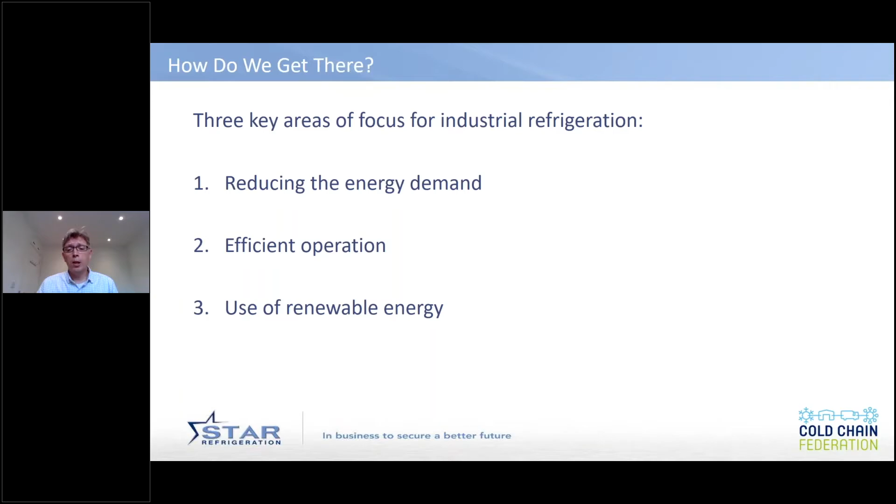So three things there. I'm really going to be focusing on 1 and 2. So where have we got so far? Well, an encouraging start, if we look at the recently published document from the Cold Chain Federation on climate change agreement performance from 2013 onwards. As an industry, you've exceeded your targets, which is a really good and positive step.

But how have we got there? Well, just some observations of things that I've certainly seen and have come back to me through working with operators in the industry. The first of which is that there has been a real change in the focus. There's been a greater focus on total cost of ownership of particularly cooling systems. On sites, they're the biggest energy consumer, and apart from transport, which we've already covered with Alan, these are a major carbon emitter for any business in terms of the energy that they consume.

And there's been a greater focus in terms of how can we get that energy cost down, because in the life of a refrigeration system, more than 60% is down to energy. Historically, there'd often been a focus on capital cost, and that still remains important. But actually, investment at the capital stage can save significant amounts of energy in the future in terms of operating efficiency, not just at peak demand, but also throughout the year. It can also help in terms of reliability as well, and providing better maintenance costs.

And one thing that is very clear as well is that operators are much more focused on what their running costs are. They've got a better handle on the energy consumption for their site. A bit I'll come on to later on is do you know whether that's good, bad, or indifferent? And a further step that people have taken is moving away from high GWP gases. I know Alan mentioned that previously, and moving towards gases like ammonia, which have no effect in terms of global warming if they do pass into the atmosphere.

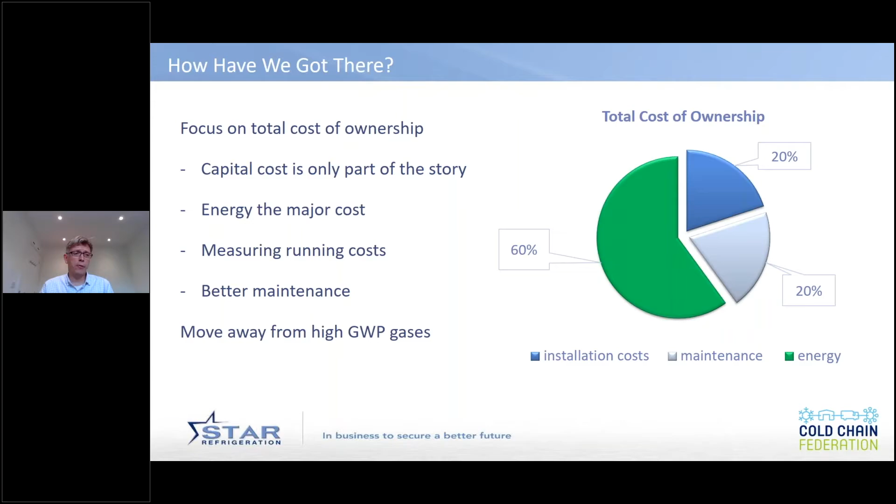From a refrigeration industry point of view, manufacturers of equipment and suppliers of systems have been really focusing hard on improving efficiency of plants, both in terms of new equipment, but also retrofitting energy-saving devices onto existing equipment. Things like compressors, which are the real heart of any refrigeration system and typically consume 70 to 80% of the energy, have been a real focal point. Selecting the right type of compressor based upon the application, the temperature, the size, and load profile within a store. Chill store load profiles differ quite considerably to cold stores, for example, based upon ambient temperature. Really focusing on that, picking the right equipment.

Fitting variable speed drives is very good in terms of part load efficiency, because refrigeration very rarely runs at its design capacity. It often runs at much lower capacities and in lower ambient temperatures. And then also looking at things like EC fans on evaporators and condensers. That's helped reduce energy consumption there, and they typically account for about 20% of the overall system operating cost in terms of energy drawn. And then the amount of energy that's consumed throughout the year, how we can take benefits in the seasonal changes in temperature, because as the ambient temperature reduces, we should be able to take benefit of that and actually reduce the consumption of plant.

So we've looked at how we can better optimize that, and by fitting various pieces of equipment, we've achieved certain improvements. Then looking at things like controls. Controls have become more sophisticated through the development of PLC systems. They enable you to take the best advantage of all those components that you've fitted and bring them all together to an overall system improvement. And further developments mean that you can actually monitor real-time performance, and it can alarm and alert to say we are moving away from what is good in terms of efficiency, and you need to come and do a service visit or improve various aspects of the plant operation.

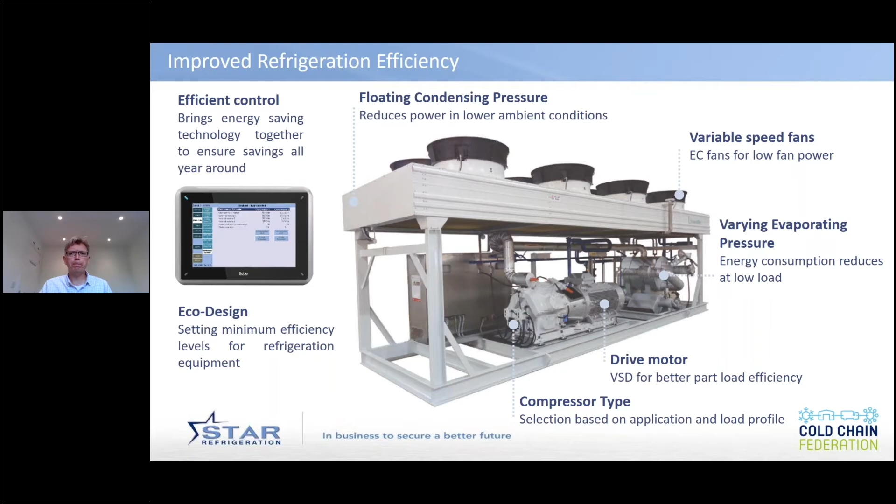So just showing that graphically, if you look at a typical system, a traditional type of system as being your 100% energy consumption, moving to efficient equipment, we can get significant benefit from things like variable speed drives on pumps, fans, compressors. Typically in this example for an installation that we looked at, about 19%. But the real boost in efficiency comes from actually tying that all together and making sure that whatever is controlling the starting and stopping and speeding up and slowing down of all these fans is operating efficiently.

And then more importantly, as the plant goes through its operating life, is monitoring to make sure that it retains its efficiency. Because it's one thing to have a plant that's efficient on day one of commissioning, but 5 years later, it still needs to be there. Otherwise, this creep in energy consumption, which can be small year on year, but over many years can be quite significant.

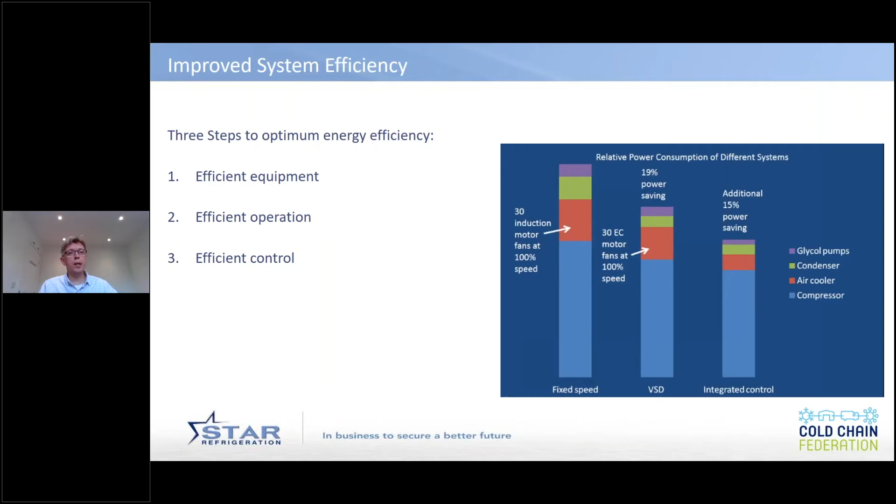Further improvements, there's been a lot of changing in terms of store operating temperatures, particularly at lower temperature. Traditionally, -25 or -28 might have been used for frozen storage. But for every degree we increase the temperature of those chambers, we can get a 2 to 3% improvement in energy consumption. And so therefore a move towards more of a -20 type figure has been a popular move, saving 10 to 15% on energy consumption. That has to be done quite carefully, particularly when you look at it in relation to things like demand response, which is very popular within the industry as well.

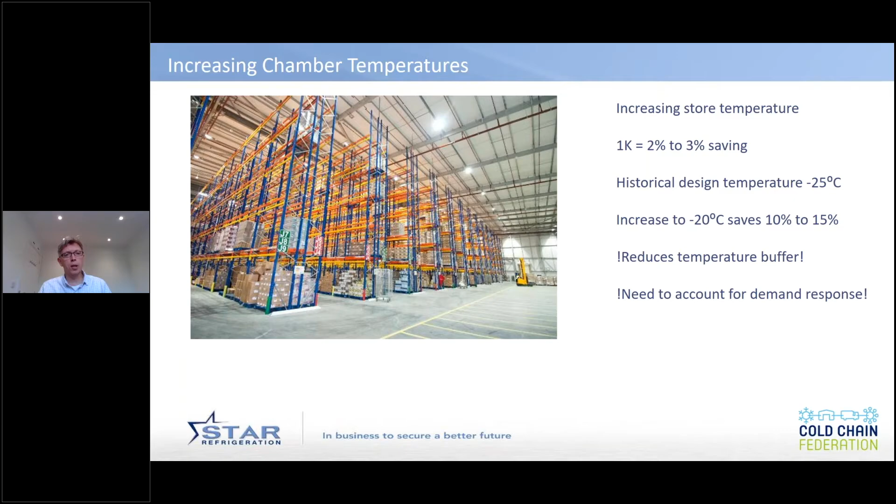By raising the store temperature, you reduce the buffer, the temperature buffer that is there should anything happen to refrigeration equipment, should there be a power shortage, or should you be off due to demand response. And it is a careful trade-off with those to make sure that you've got sufficient equipment and that you don't compromise product temperature when doing this. But we've seen many operators move away from the more traditional temperatures, particularly at frozen conditions, to a higher temperature to improve performance.

And then the other thing we've seen is around the operation of the facility as well, a greater focus on particularly things like doors. The refrigeration plant only really runs to extract the heat that has gone into a particular chamber or building. And by far on warehousing, the biggest sort of contributor to heat going into the building is through doors.

So here's a couple of photographs of examples of poor door control, ill-fitting lorries onto loading docks, leaving large gaps, lack of maintenance on doors. The diagram on the right is somebody propping a door open because it was broken. They didn't want to close it because then they couldn't get it open, so they propped it open. All of the time, energy is pouring into that building, not to mention the health and safety issues associated with water coming in through the door as well.

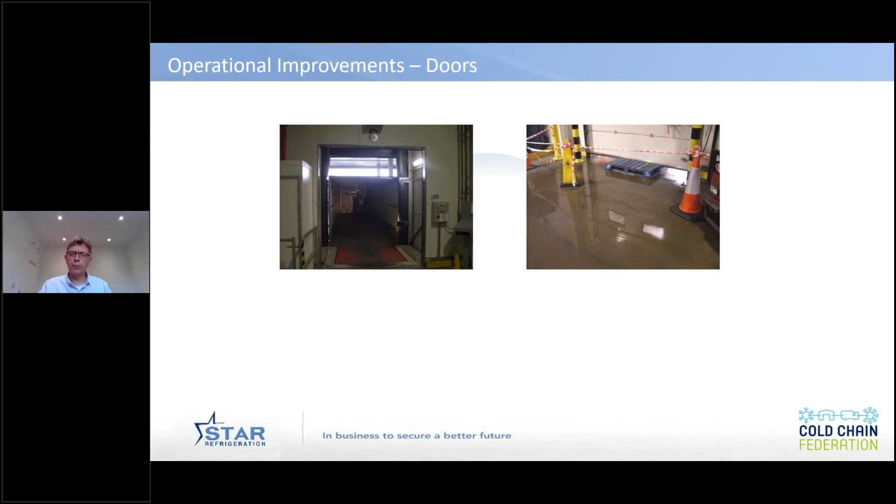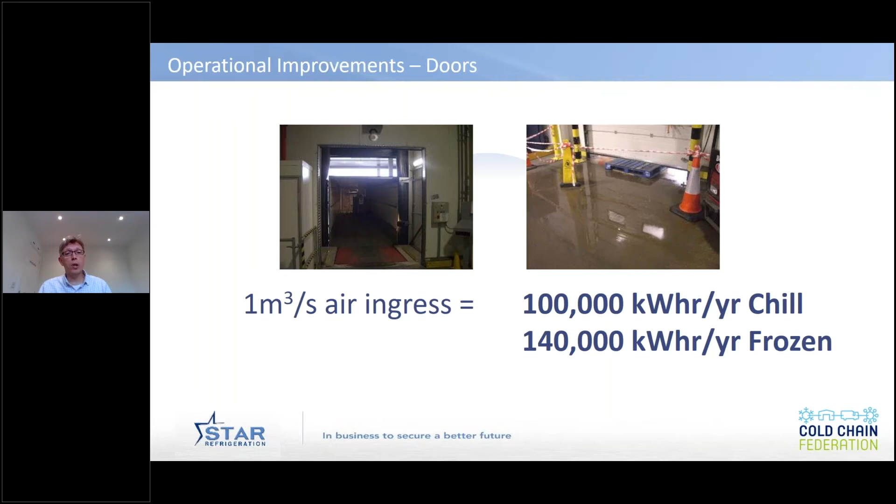And just putting the stark facts there, for every meter cubed of air ingressing into a facility per second, over a year, that's consuming something like 100,000 kilowatt hours for a chill store, and for frozen about 140,000 kilowatt hours of energy. So we've seen much more focus on better operation, upon door control, and trying to avoid this infiltration. But it's an area we could really work on in terms of the future as well.

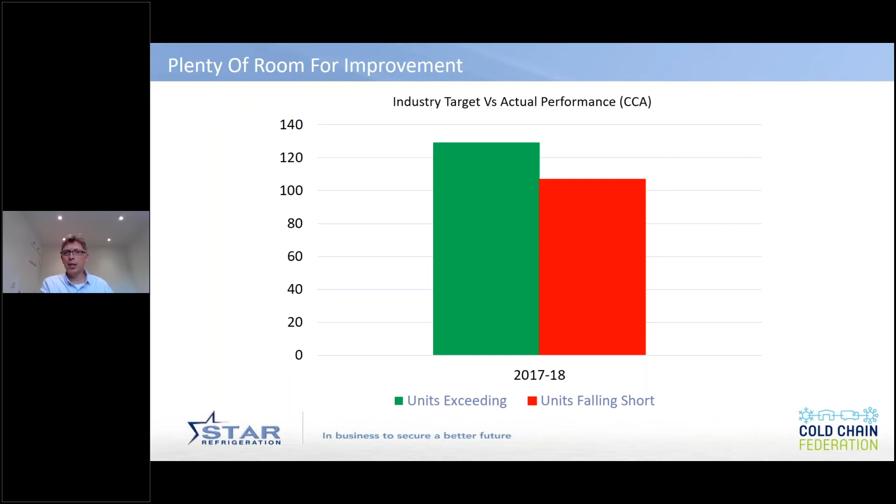So lots of good things that have been happening, but actually when you look at the report and the recent document issued by the cold chain, what you'll notice is that whilst around 55% of all those measured exceeded targets, there were 45% that didn't exceed the CCA targets. That's a great opportunity for those 45% that didn't, because we need to bring them along on the journey. We need to turn them from red to green. But what we also need to do is reduce the energy consumption of all those that did exceed, and we need to continue to push and improve from that perspective.

The good news is that there is a real opportunity to take control of this moving forward. Alan already mentioned about this whole idea of monitoring what you're doing and assessing what can happen. And that really starts with benchmarking. And that's one thing I would really recommend that operators do. Many do benchmarking within their own business, but we heard from the previous presentation, actually, collaboration is a key part of all of this as well.

So benchmarking as an industry would be a good starting point. And quite a lot of work has been done on this. There was a really good report written 4 or 5 years ago, which looked at benchmarking stores across the whole of Europe, and we'll come on to that a little bit in the next couple of slides. But once you do that, you can assess where you are. You know what the size of the task is ahead. Also, commercially, what the size of the prize is as well, because reducing energy consumption, reducing the amount of carbon emissions through the electricity means that you can actually save on running costs as well.

From there, you can then start to implement a plan moving forward. And as was previously mentioned, this is an iterative process. It's a case of continuous optimization. Look at how we're performing, look at where we're heading in terms of our journey, and carrying out further improvements, and then driving down carbon emissions. And with that as well, what we tend to find is we get increased reliability. So it's a real win-win.

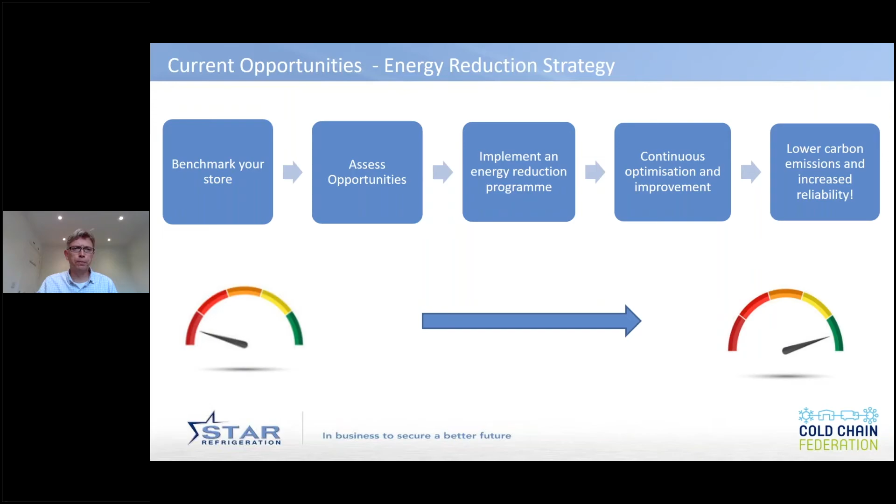It's really simple to do. Here's just an example of a simple calculator that we've developed with my own business. And from that point of view, it needs basic information. What's the volume of the store that you're operating? What's your annual energy consumption? Both of which you'll know because of things like the climate change agreement information.

By inputting your energy costs, you can actually determine what the financial benefit would be for improving efficiency. And then a rough estimate of what the percentage consumption of the refrigeration compared to the overall site is will get you a better feel for your performance as well. But from that, what you can then do is start to benchmark.

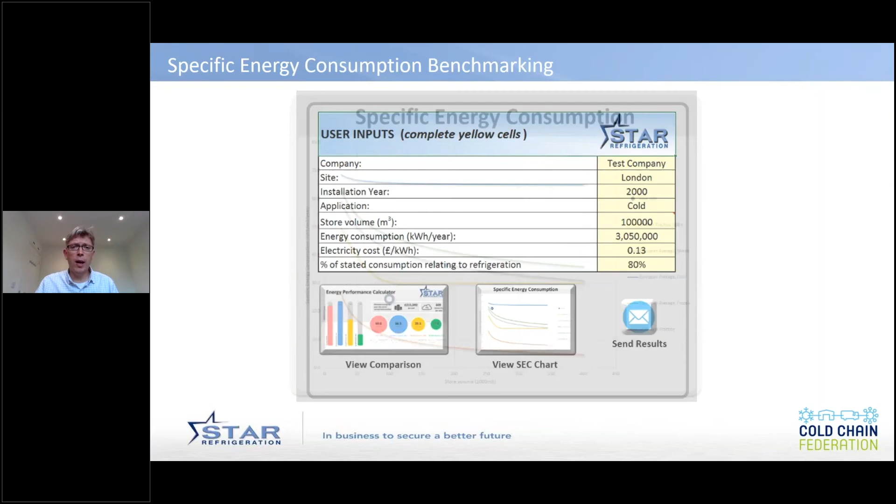So the graph here shows some European statistics for temperature controlled warehousing based upon volume on the bottom axis there, and then specific energy consumption up on the left hand side, which is the amount of kilowatt hours per meter cubed of volume per year. And by inputting that relatively straightforward, simple information, you can compare that: the blue line at the top is the average for European chill facilities, green is for frozen facilities across Europe, and grey is mixed.

What is noticeable there actually is the European performance is actually higher than the yellow line, which is actually UK best practice from 1994. And one would have expected that we've improved somewhat since 1994, but I'll come on to that later. But yeah, benchmarking on there, how well am I doing? And actually, should we be setting some more strict and challenging targets as we move into the future?

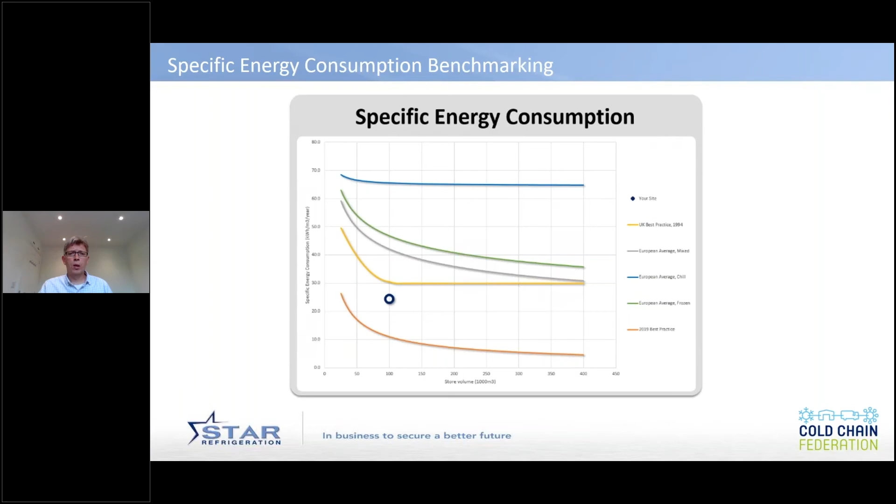From that benchmarking, then what you can also see is, well, how many tons of CO2 emissions could I potentially save if I get towards a future best practice target? And you can start to measure that. You can start to measure your performance against it. You can start to implement changes in the way that you're doing things and seeing whether you're heading in the right direction towards that. And at the same time, you can also get a feel for what that would save in terms of operating costs per year, because some of that then can be ploughed back into further investment.

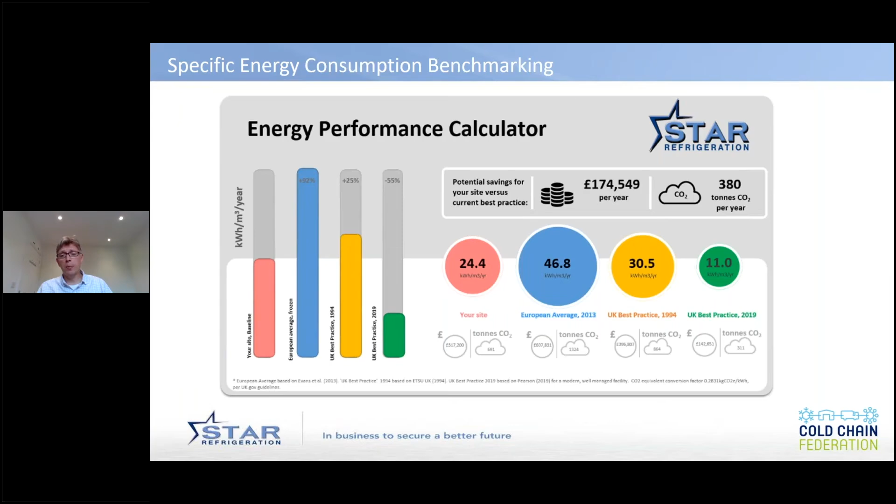What we also have the opportunity now as well with the technology that is in the marketplace at the moment is to really take control of day-to-day performance of this big energy consumer on any site. As the owners and the operators, you can get that information in real time. You can see when performance starts to slip, and you can actually take control of that and deal with it straight away. Most modern refrigeration systems have the necessary telemetry and information. It's just not extracted and turned to good use.

But with modern software, we can perform calculations to determine actual plant performance and compare this to what it should be doing based upon the way that the plant was designed, looking what that gap is, and then saying, well, from that gap, what are the steps that need to be taken to get me back to an optimum position in terms of performance, to get my carbon emissions down from my refrigeration system, and what's the benefit going to be if I implement these?

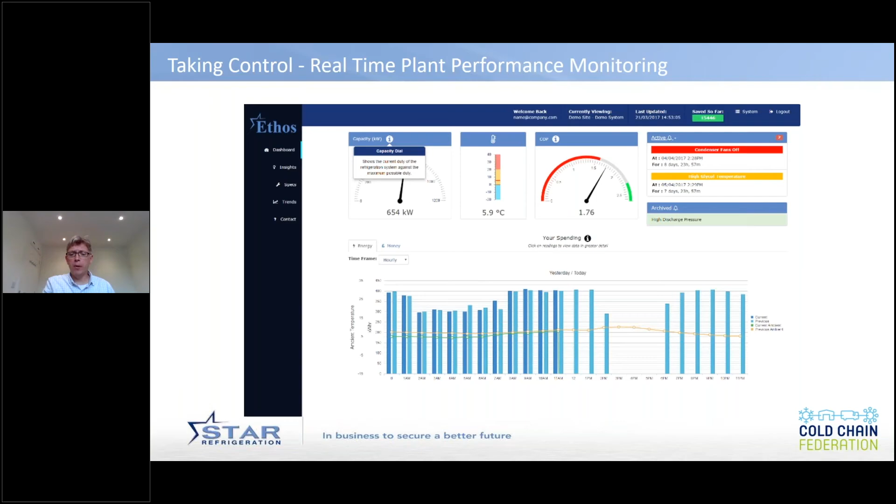So yeah, taking back control of all of that, finding out, is it because of underperforming equipment? Do set points need to be changed on it? That information can all be extracted, taken away, and this is all done.

It can all be done in the cloud, away from site. Reports issued on a regular basis, and therefore you're taking control of what is actually happening on the facility, day by day, week by week, month by month.

It's basically moving the refrigeration plant from that room at the back of the facility that's quite noisy, that nobody ever goes in, and bringing it to the forefront and putting it in the vision of those that are actually operating the store. It can also then, through the savings that are projected and through an understanding of load profile, really provide useful information to drive your business moving forward.

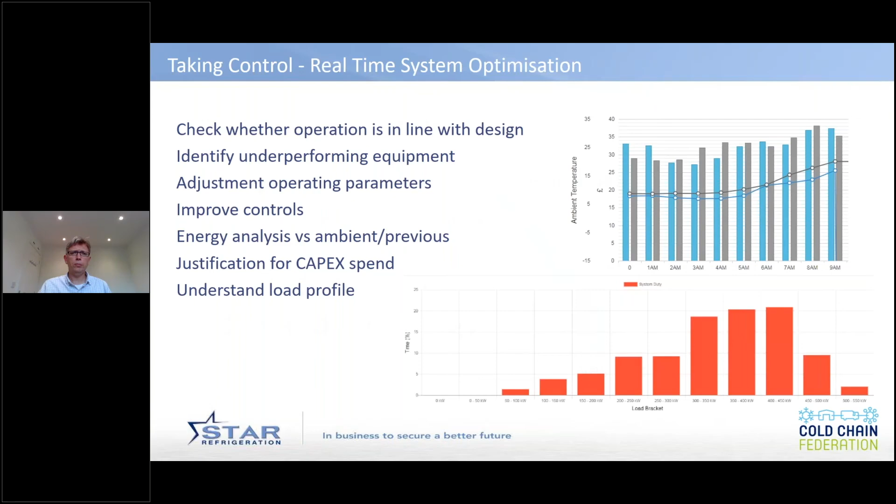So that's where we've gone. That's what we've got available to us at the moment. So it's really using that big data to drive the business based upon what we have at the moment. But what does the future hold for us? Well, we're talking about moving from this 2020 position. We've already seen the graphs in terms of how challenging that's going to be.

And getting down to net zero, as I said at the very beginning, is really about looking at what the demand for energy is, driving that down. And that, going back to one of the earlier points as well, is a collaboration. It will involve, in the future, looking at the building design, looking at innovation in there to reduce the amount of energy that is going to be needed for cooling, to reduce the demand for cooling requirements within the facilities.

It's going to need to look at how the store is operated. If the operation is bringing in large amounts of warm air, which is creating a huge energy demand within the facility, how can you reduce that down? What are the steps that can be taken? How can that be done better? And at the same time, what are the engineering innovations that are being developed? What is the best in class equipment that I can be using to drive down my energy consumption?

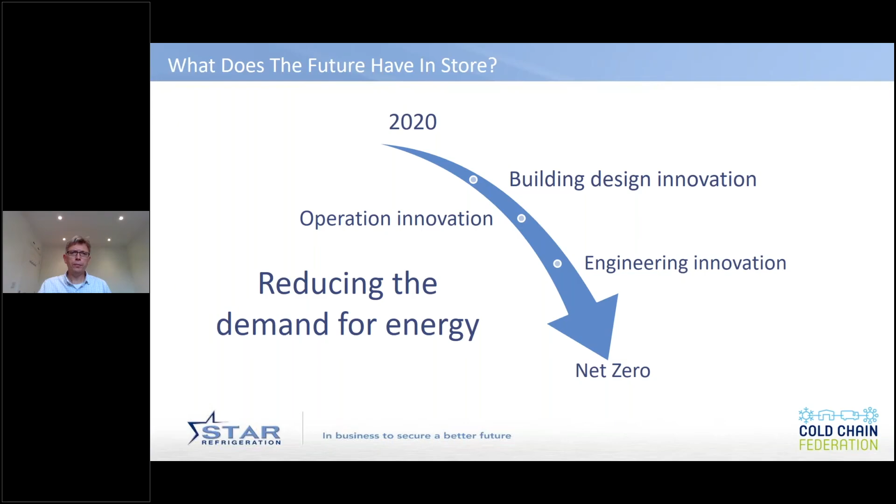And that is a collaboration. It's bringing together the designers, the architects, the construction companies. It's bringing together the operators in terms of innovation on that side, and the engineering businesses to actually support that. And then it's really setting those benchmarks.

The positive news is that the data taken from existing facilities is suggesting this is possible, and through that innovation that we spoke about on the previous slide, there's no reason why we couldn't actually get there. It's all about reducing that demand, then making it as efficient as possible, and making sure that that's implemented, and then moving to that renewable source.

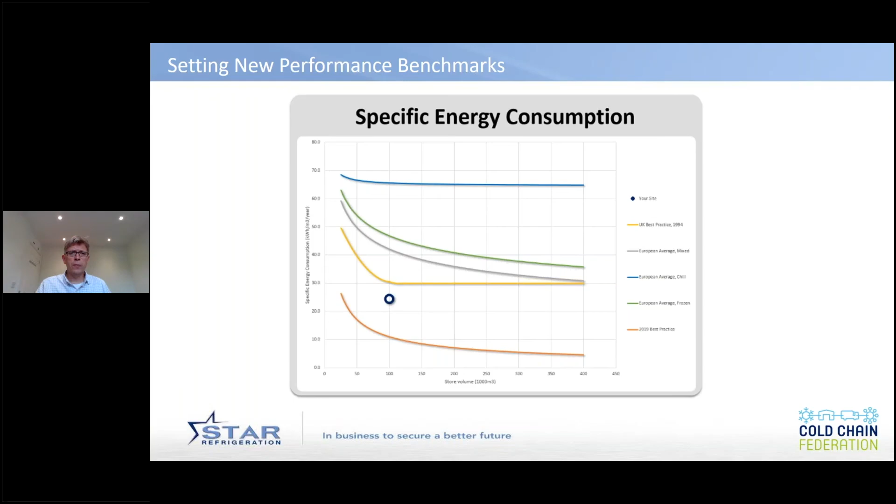But then we have to start to look further afield, because we've got this warehouse, we're keeping it nice and cold, but as an industry, we basically take heat out of a warehouse, we put some more energy into it, and then we chuck it out into the atmosphere. And I know we talked about this earlier in the year in terms of combining heating and cooling, but the cooling industry is one part of the equation, and a much bigger carbon user within this country is heating. And that's heating of businesses, homes, office blocks, towns and cities, etc.

At the minute, as an industry, we're chucking lots of heat away, which, if we could actually capture that heat and boost it, and put a fraction of the amount of energy and carbon into it than we would typically using boilers or gas, we can take that heat, extract it, and use it elsewhere to provide heating into homes and businesses. And all of a sudden, we're not just a consumer of carbon, but we're actually able to save carbon elsewhere in the bigger picture, because we're going to be donating all this free energy that we would have previously thrown away.

That's going to need quite big infrastructural changes. We don't have district heating as a standard in this country, but could we be feeding our energy into a ring main that then goes off to get taken somewhere else to be put through things like heat pumps to generate heating for houses? That way we're decarbonising our heating, but we as an industry are then contributing to that. So just a blue sky thinking further forward, but actually your business may no longer be a cooling business, but it might be providing energy for heating as well in the future.

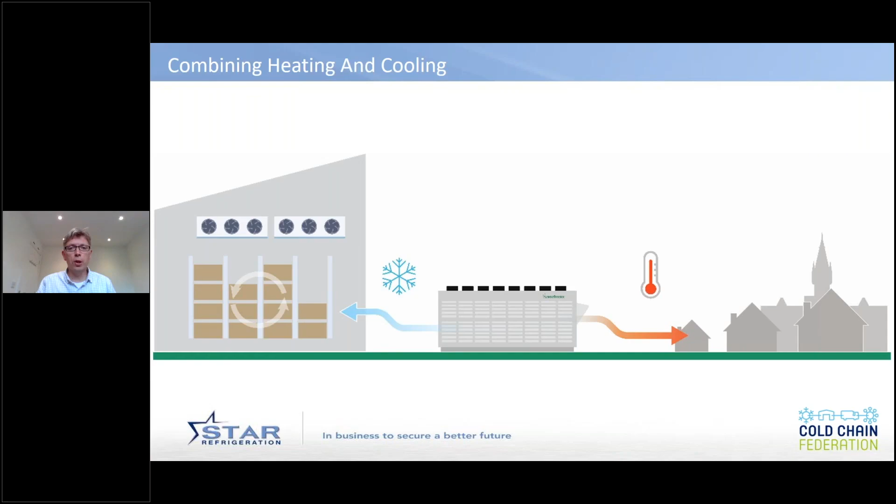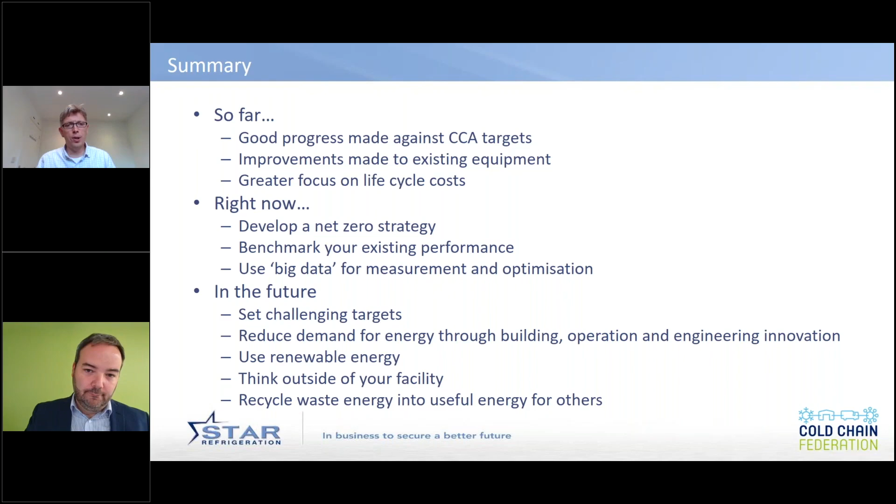So to summarize, so far we're making good progress. We've seen a lot of improvement, particularly focused around the efficiency aspect of equipment, certainly in refrigeration. And we've definitely seen a change in people's focus in terms of looking at what the life cycle costs are for equipment. Right now, we've got this opportunity to really capture the big data that is available to us, that is being produced all the time, particularly by our refrigeration systems. We can capture that. We can use that to first benchmark where we are, set our strategy, and then look to measure and optimize on an ongoing basis.

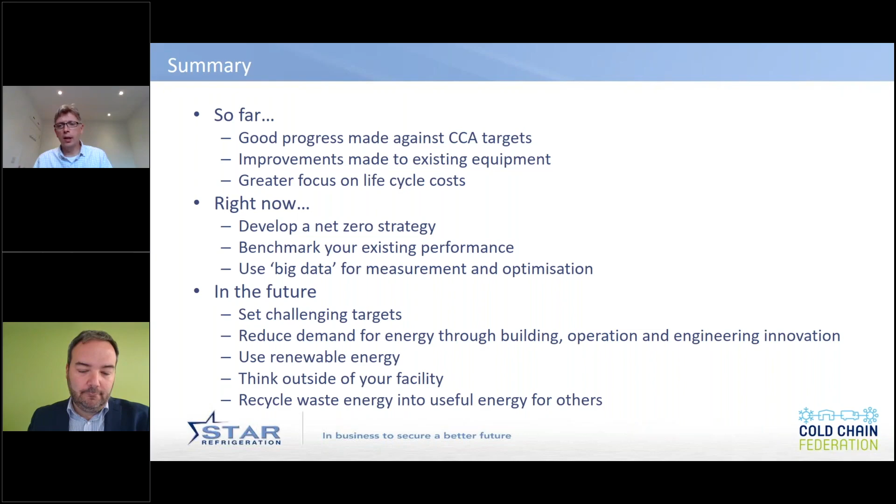And then in the future, it really is about setting some really challenging targets to get us to where we want to be in terms of this net zero. That's going to be a collaboration of bringing people together in terms of building design, operation, and engineering, and using innovation from all of those. There is this change to renewable energy to decarbonize our electricity, but also to think outside of our own warehousing. How can we take away our waste, recycle that waste, and give it to others who may find it really useful? So lots covered in there.